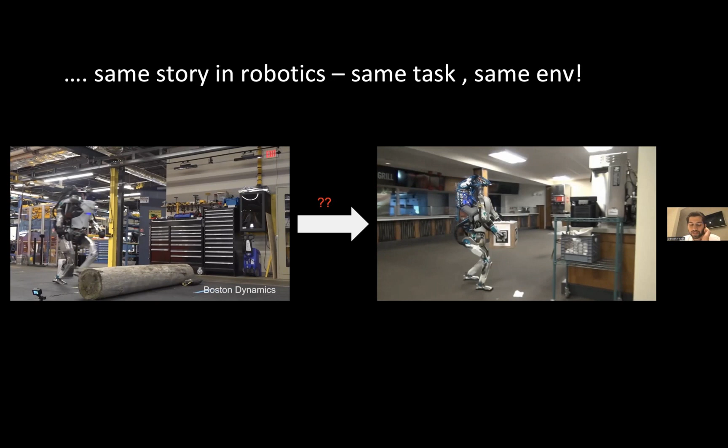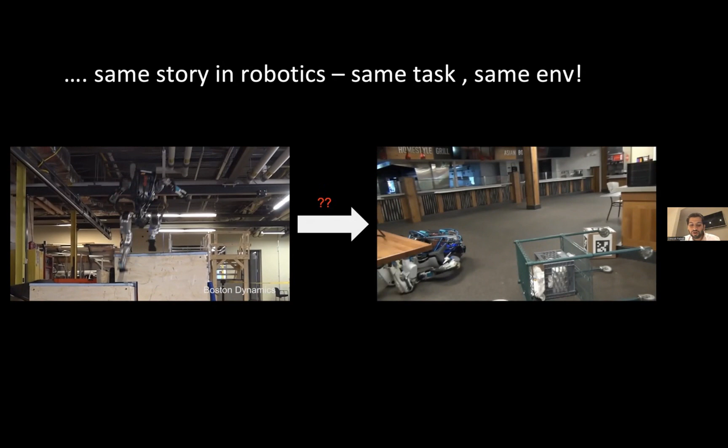So the problem of generalization in robotics really boils down to this question: how do we generalize beyond training scenarios? And the argument in our group, or the argument that I believe in, is that if we truly want to generalize beyond training, there is only one way - we have to figure out how to keep adapting. What I'm arguing against is this current paradigm where we train the systems once, we freeze it, and then we transfer them to something at test time.

Now, take this example of a child. If you freeze the brain and you stop learning, you cannot expect to generalize in this ever-changing world.

No matter how smart you are, if you stop learning by the age of 10, you cannot function 10 years later in your life. This is why learning in nature is kind of contrary, it is driven by continual lifelong adaptation, as we saw in the previous talk by Eva as well. This learning goes on forever. It's not only about getting supervision, it's also about deciding what to learn, what tasks to learn, and continuously adapt. So the question really is, how can we formalize this idea of continual adaptation?

In this talk, I'll give you a couple of examples of how we can formulate this concept and how this can be relevant to robot learning. Just to start, even though I mentioned that the goal is to learn multiple tasks across multiple environments, for now let's assume your task is fixed. Let's say you are focusing on a single task, and then let's study how we can adapt continuously to multiple different environments. We'll generalize this idea to multiple tasks in multiple environments towards the end.

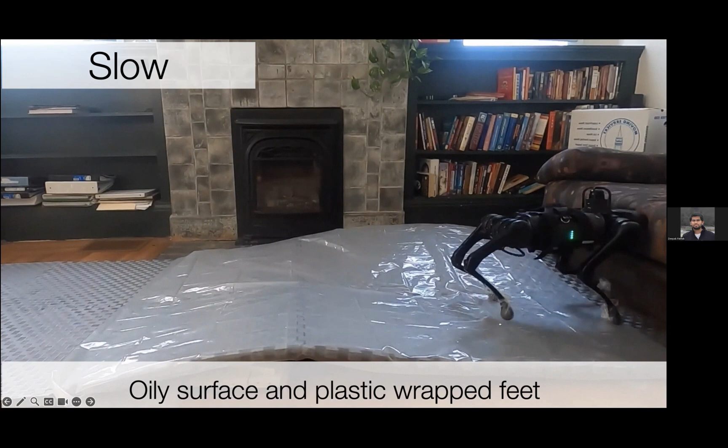To give one more example, here we are throwing weight on the robot. A robot cannot even see the weight, but it can adapt its body as soon as the weight touches it, and it's very agile like an animal. We're showing this in slow motion to really understand what's going on.

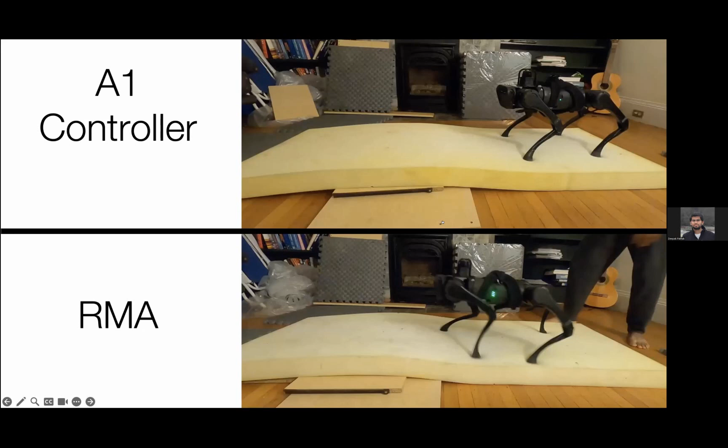Here is one more example. Here you put a classical controller, which was a robust controller, on a mattress. The robot gets confused and cannot walk. But using our approach, you can easily walk over this mattress, etc.

There's a lot of work in robotic locomotion. I won't go into comparisons with each of these works, but I'll just highlight the key innovations and exciting pieces of this work.

One of the main things here is that the policy was directly outputting all the joint angles of the robot, so there was no hand-coded heuristic gait or locomotion controller. With a limited amount of training in simulation, the robot was able to generalize to a wide variety of situations, as we saw in the examples. Finally, the design was asynchronous - you can run the adaptation separately from the compute on the robot.

Going into a bit more detail, the first aspect is there is no hand-coded or heuristic control stack. This contrasts with locomotion literature in robotics, where people have taken huge inspiration from gaits in animals - animals show structured gaits like walk, amble, pace, etc. For the last century, various models have been proposed to copy and mimic these gaits into robotics through computational paradigms. Currently, most robotic results rely on some sort of primitives to learn or encode these animal-inspired gaits, and then train systems on top of them.

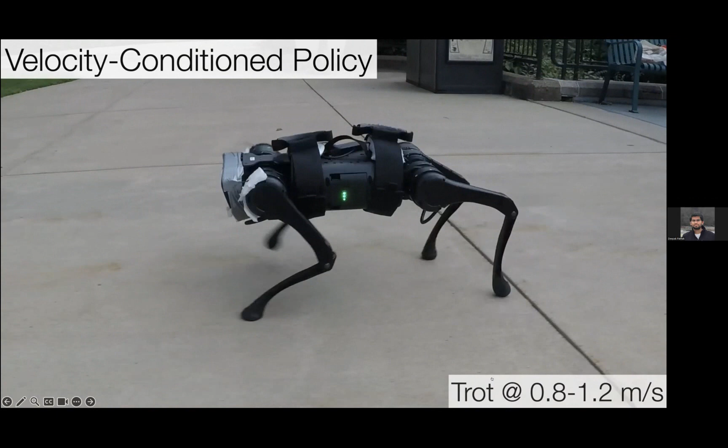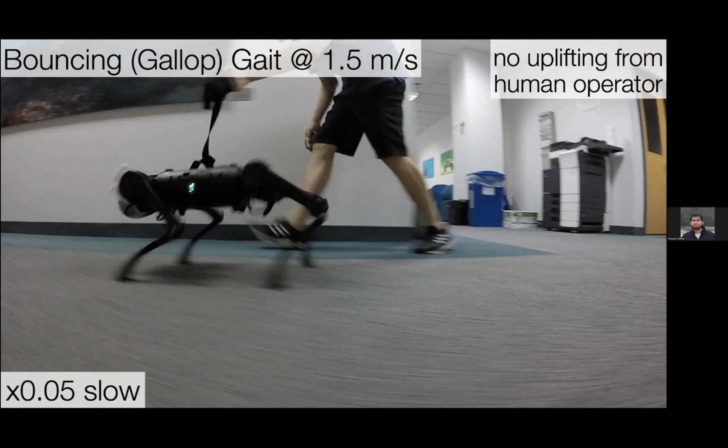Here we can see this robot changes gaits. At low speed it is walking. If you increase the speed, it trots. If you lower it again, it walks. And if you increase the speed again, it starts to gallop. At very high speed, here's an example: you can see it is galloping in the air. So it has learned an emergent flight phase where the whole robot stays in the air the whole time.

Some of the key questions we have been studying since this work are: how do we scale this system to more complex robots? How do we go beyond locomotion? And how do we scale this to higher dimensional inputs like images?

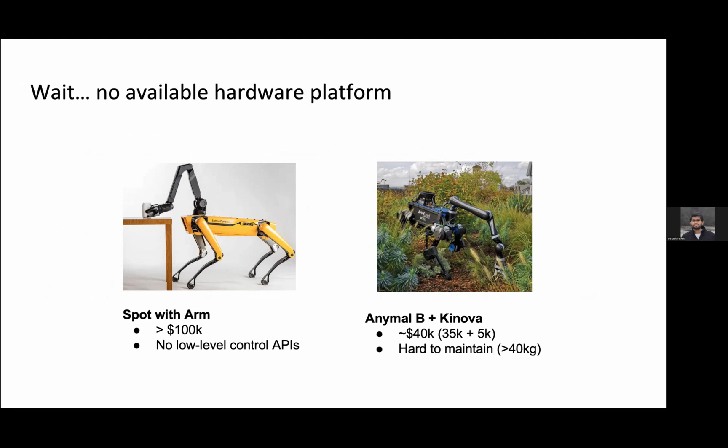To study more complex robots, just locomotion is restricted. So more recently, we have added an arm on the robot. The idea is that current existing robots which have an arm and legs together are very expensive—Spot is more than 100K USD. So we built a low-cost system which costs around 6 to 7K: a 3K low-cost legged robot with a 3K arm on top, which is just taped together on the robot. It's a very low-cost system.

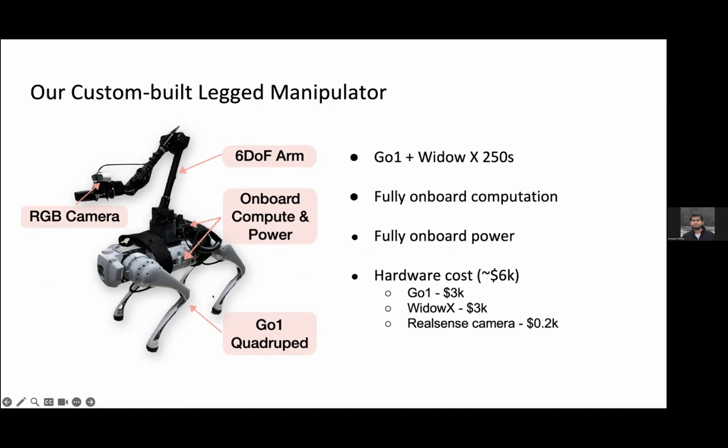But the problem is extremely challenging—it's a very high-dimensional problem figuring out how to make the robot work on this platform. When you add an arm with legs, the arm and legs have competing objectives: the arm wants the legs to be stable to function properly, and the legs want the arm to be stable to walk properly. The solution in the literature has been extremely hand engineered—people design one controller for the arm, one for the legs, and then put them together through another engineered system. In this work, we wanted to study whether we can scale the same idea of RMA to control the whole body altogether at once. We applied the same idea, and it turned out it did not work.

When we scaled this system exactly to a higher dimensional robot, it did not work, because we had made an assumption in the previous method unknowingly: that compression implies predictability. This was the assumption.

In phase one, we were trying to compress the environment into a latent vector, and in phase two, we were trying to predict that from history. But there is no reason the particular compression encoding learned in phase one is predictable from phase two if phase one is not informed about phase two. So in this work, we tied phase one and phase two together, directly supervising and regularizing the embedding to be predictable while it is learning to compress in phase one. Then we applied this whole system to the whole body altogether.

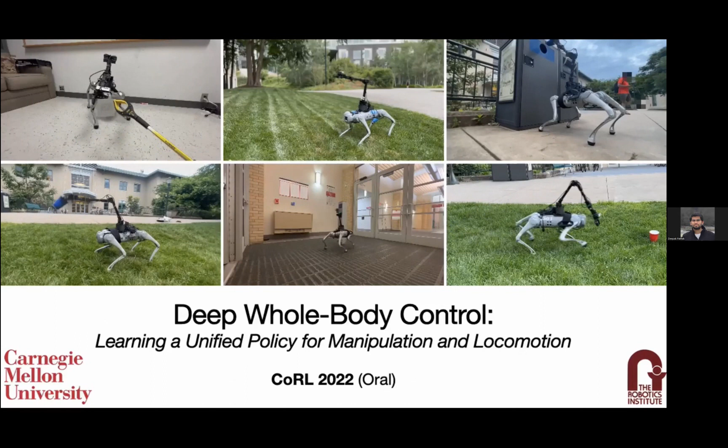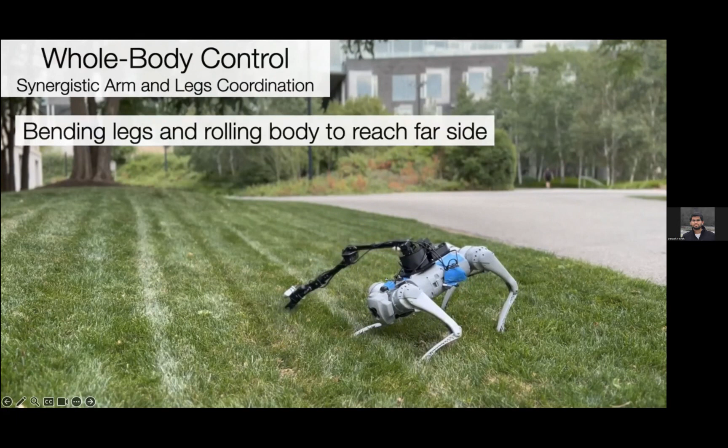So here are some results. This robot is controlled by a single neural net. You can notice as the arm goes down, the legs bend automatically, the body rolls. You can notice the arm is not even attached properly to the robot—it's taped to the robot using this blue tape over here. But the single network treats the whole body as a single controller.

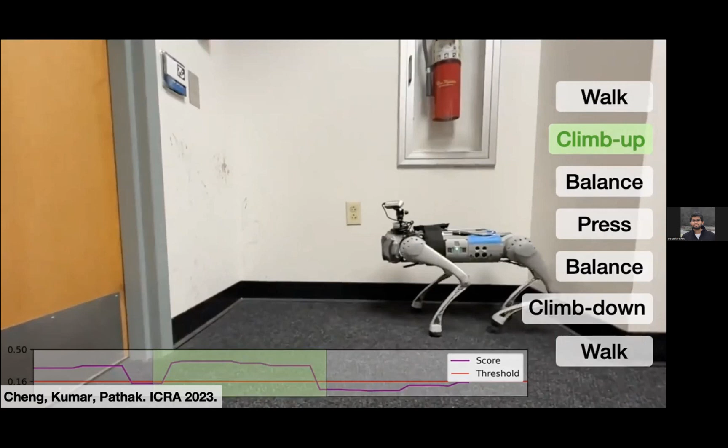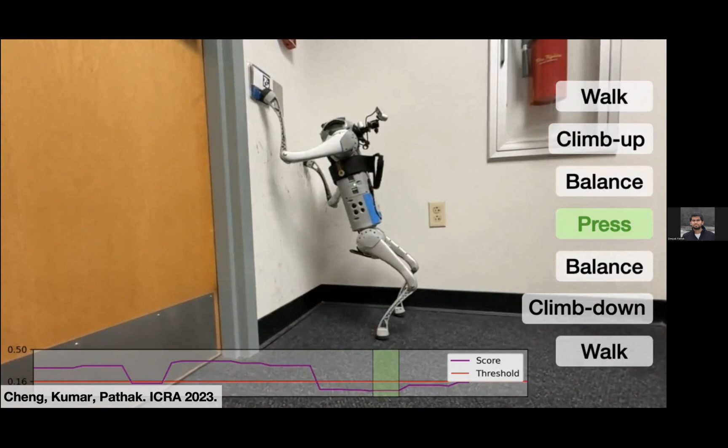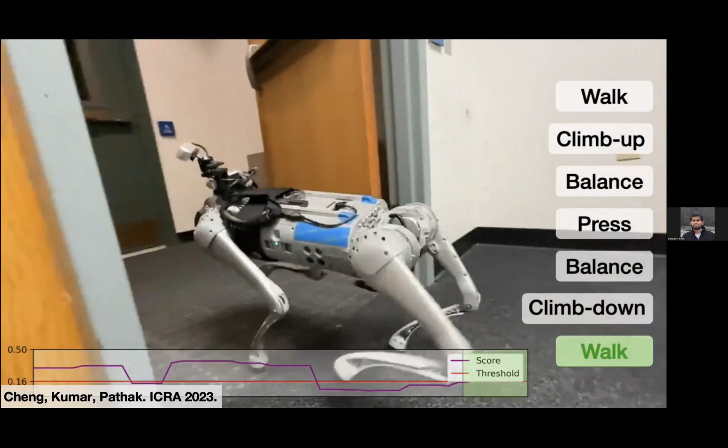If you see this in slow motion, you can see the robot can adapt and climb the wall nicely. We can also adapt using vision.

So far the robot was blind, and even the blind policy was very effective. You could see it can walk in multiple scenarios. So why do you need vision?

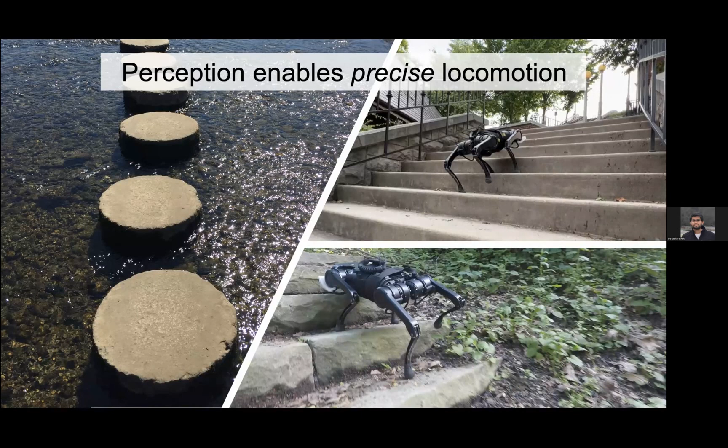Well, we need vision to walk on very challenging scenarios like stepping stones on the left. We cannot walk blind on that, or climb stairs intentionally. This is a studied problem in literature, but the typical approach is to first build a map of the environment using vision, then use that map to walk and find footsteps to walk on in the real world.

But the issue is when you build a map at such high frequency, the terrain map gets very noisy. This is the paper from Marco Hutter in Science Robotics. You can see the map they are building - they show impressive results, but if you look closely, the maps are quite noisy. To deal with this noise, they have to add noise in the simulation itself. But when you add noise, it becomes difficult to do more precise locomotion, like stepping stones and things like that.

So in this work, we really question, do we really need maps? If I ask you how many stairs are there from your road to your apartment or room, you'll have no idea, because people do not build maps at such high frequency. We have intuitive, direct sensory perception, and we use that to perform locomotion.

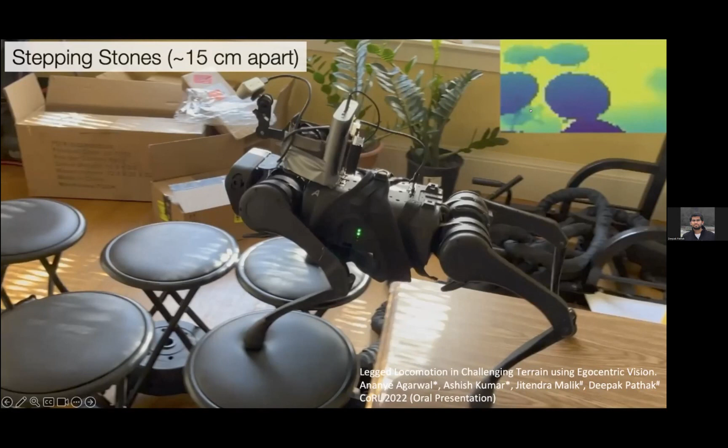So in this work, we argue to tightly couple vision and control together. We directly take vision as input and output the joint angles altogether, without building any map of the environment. The robot sees the depth image directly and outputs the joint angles for the robot.

As you see here, this robot can perform a very complicated maneuver over these stepping stones. It has no issue walking over this, and it is directly operating from its front camera. The rear legs of the robot do not even look at the terrain - they are trying to walk from memory.

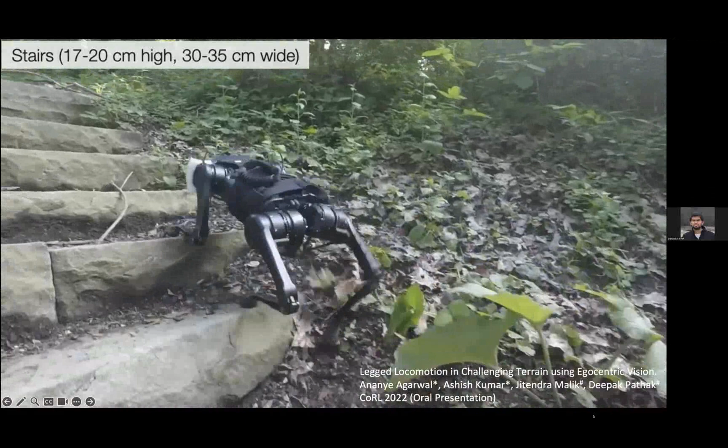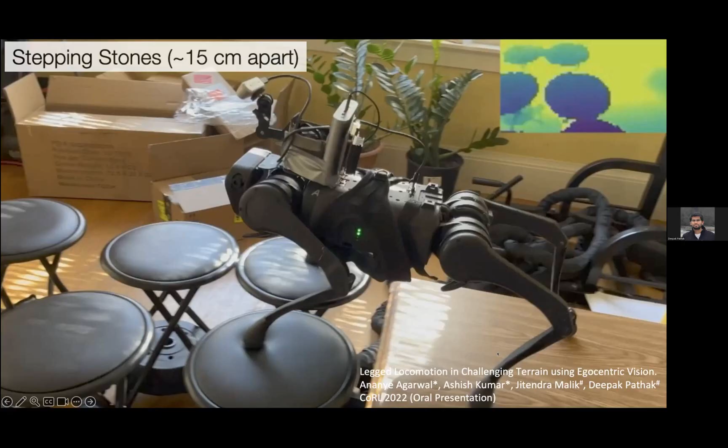And here it is climbing on very difficult stairs. These are in Highland Park in Pittsburgh near CMU. Notice the height of the stair and the height of the robot - they were almost the same, but the robot has no difficulty climbing this. In this example, the height of the stair is very high.

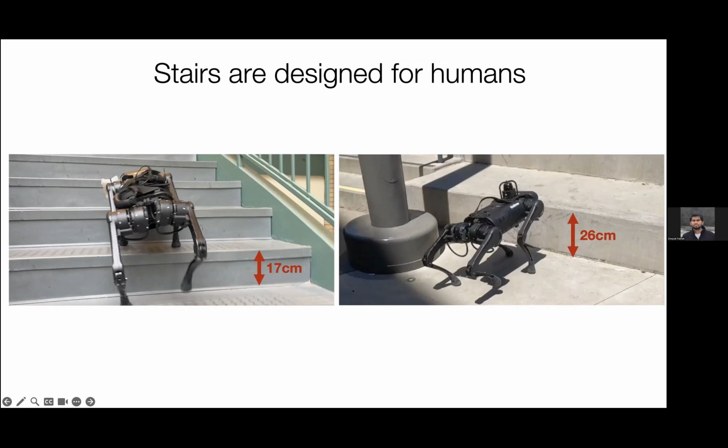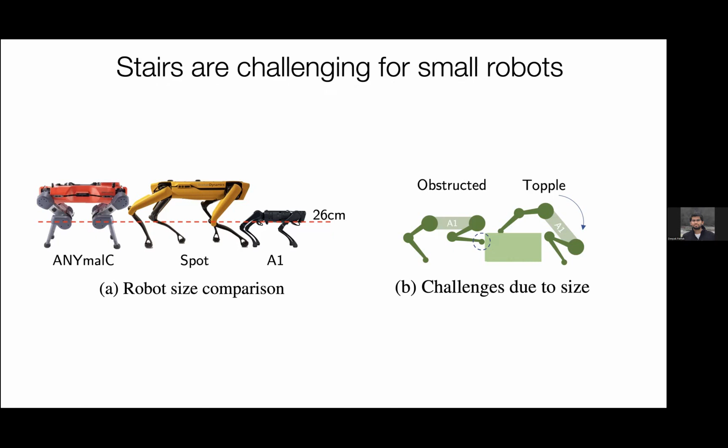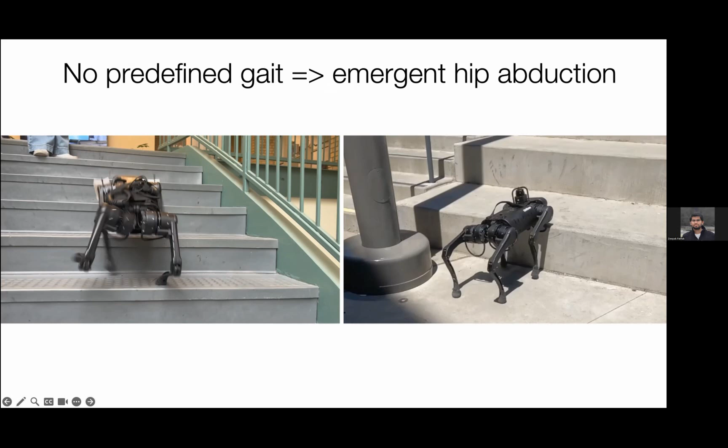If you compare this robot to other robots, a small robot more like a small dog has very high difficulty in both climbing and de-climbing the stairs. But since we are outputting the joint angles directly, we see a new gait emerge in the robot, where it uses the hip joint of the legs to create this abduction-adduction behavior to climb these high stairs.

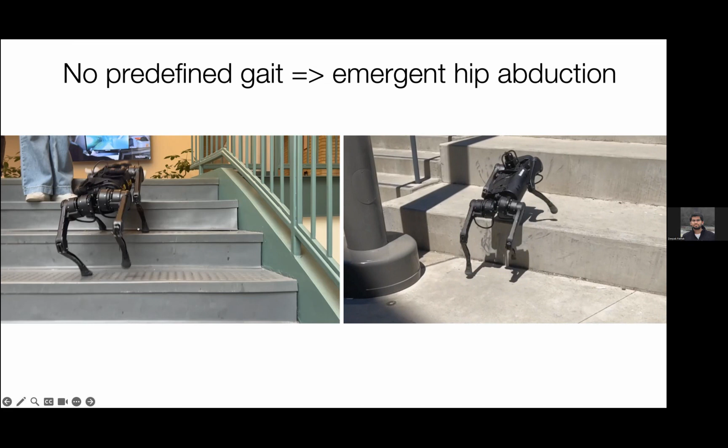So you can see here, the robot climbs stairs similar to how humans climb walls, because the height of the stair is similar to the height of the robot. So as a human climbs hurdles, the robot climbs these walls or obstacles. It also has emergent foot planning behavior.

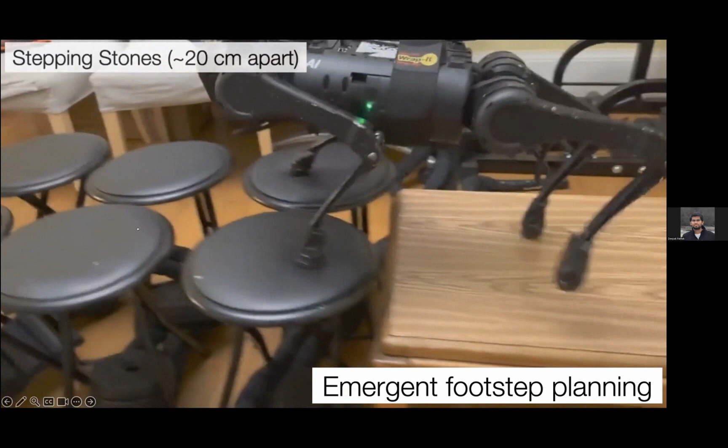Here the robot is operating in a variety of situations, both outdoor and indoor. We also compare to a variety of baselines, and the difference between map-based baselines and our method is not much in simple environments. But when you look at complicated environments like stepping stones, the difference is huge between building a map and not building a map.

We have also been doing live demos of this robot. This was in CoRL 6 months ago, and it was at CVPR last year in the Marine Park. I'll stop here and take any questions.

But let me just quickly - oops, sorry. Sorry, my slides got hung. Let me try to...

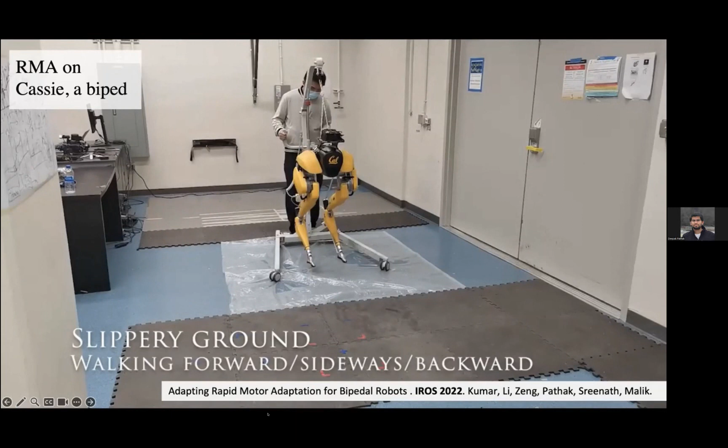Just a second. So we have also scaled this work beyond quadrupeds to even bipeds, and here you can see a biped robot walking in difficult situations.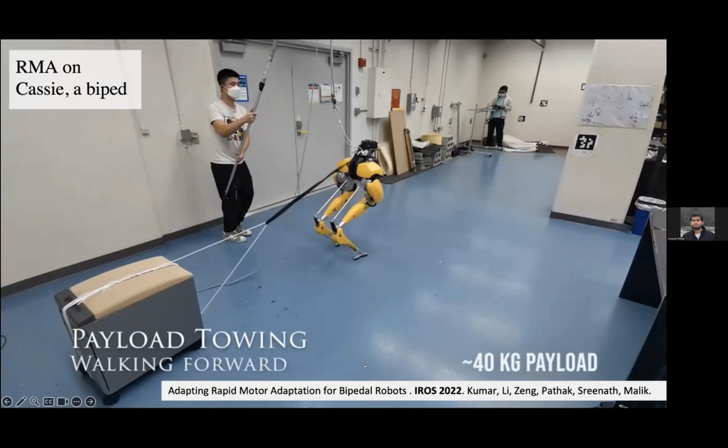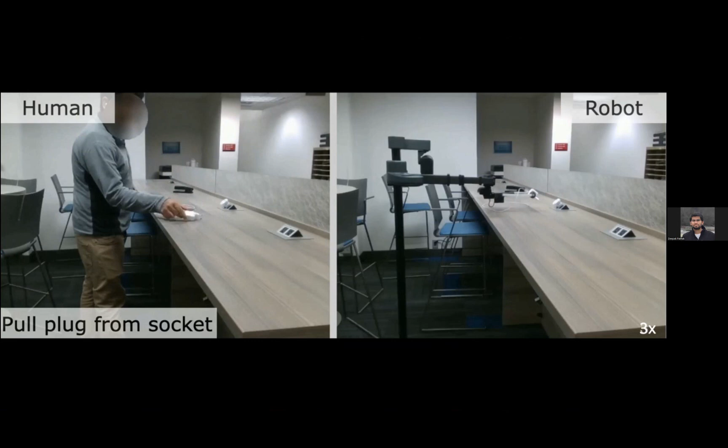I don't have time to go into more things right now, but we can also scale these ideas beyond locomotion to perform manipulation by watching humans. Here you can see a robot performing different manipulation tasks by watching a human in multiple environments and performing them.

I don't have time to go into this, but feel free to check this out on my webpage or other talks at RSS I'm giving. I'll stop here and take any questions people might have. Thank you.